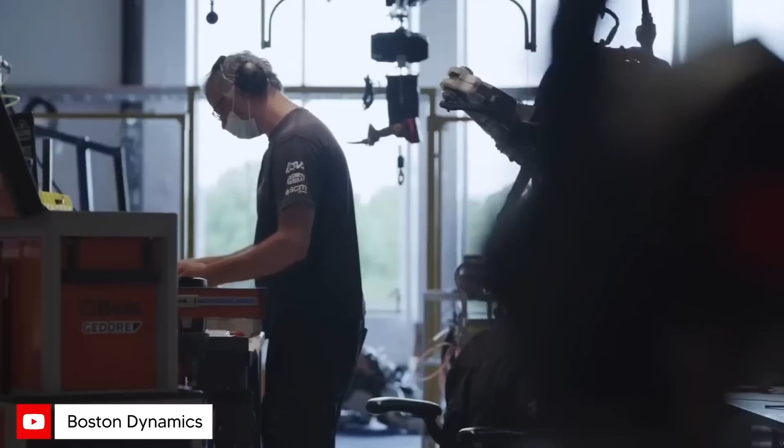Everybody knows what OpenAI is, but most people don't know that there are many AI companies out there that are silently going to be changing the world. In today's video, I'll be introducing you to 10 AI companies you probably never knew existed.

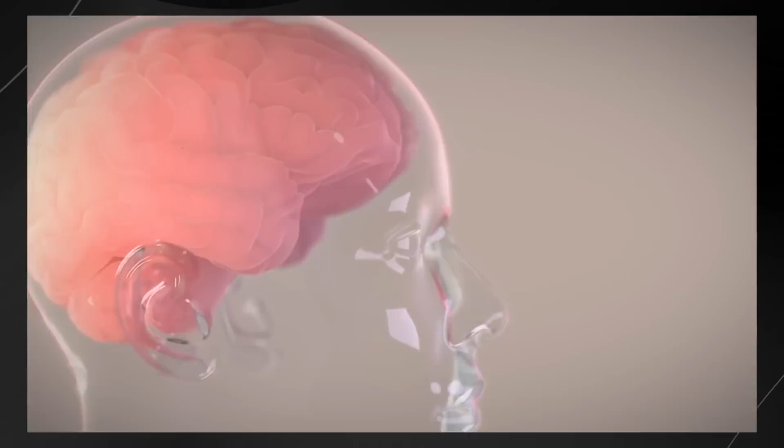So one of the first disruptive companies that you might actually know is Neuralink. This one is incredible because it lets people with paralysis, people who cannot move, use computers or phones with their mind. I know it sounds sci-fi, but it is real.

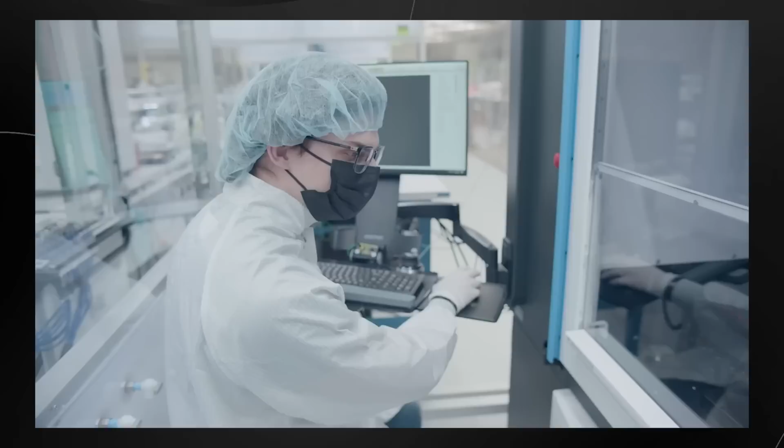It's literally one of the first companies to make this kind of brain chip small, wireless, and ready for real people, not just experiments. In simple words, Neuralink is making a brain chip that lets people control devices with their thoughts, which could change how we live, even for people with disabilities. I think that's pretty incredible and disruptive.

Another company I'd like to talk about is a company called Renovate Robotics. This is a US-based startup focused on automating roof work. Renovate Robotics was founded in 2021 and operates out of Brooklyn, New York. So what does Rufus do exactly?

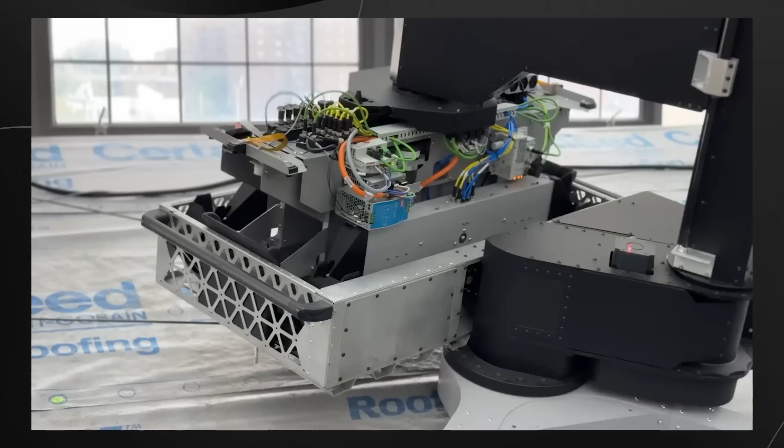Rufus is designed to automate the installation of asphalt shingles on residential roofs, with future plans to handle additional roofing tasks. Its main goals are to increase productivity: Rufus can install asphalt shingles up to 3 times faster than a human roofer, effectively doubling or tripling productivity for roofing crews. It can also improve safety by reducing the amount of time workers spend on dangerous sloped roof surfaces, helping lower the risk of injuries and fatalities, which are high in the roofing industry.

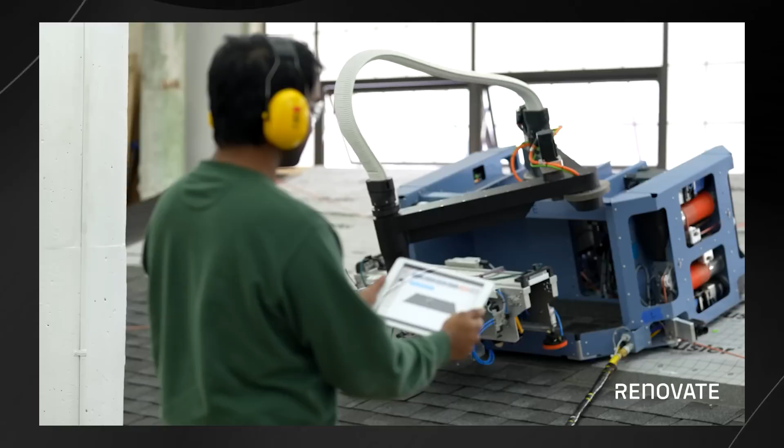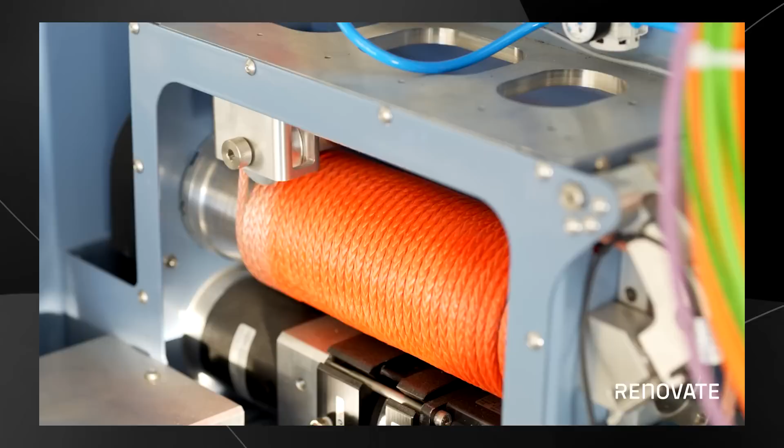This also addresses labor shortages. With a shortage of skilled roofing labor, Rufus enables contractors to complete more work with fewer people. It also enhances quality, using machine vision and AI to ensure shingles are installed accurately and consistently, improving installation quality and providing data for warranties.

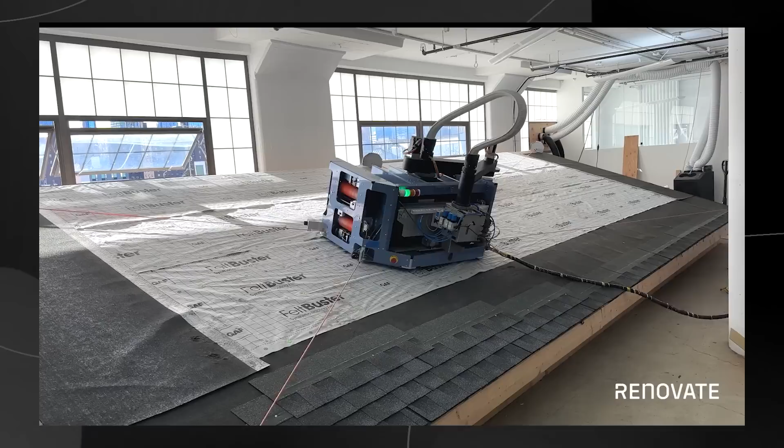Rufus uses machine vision: cameras and AI-powered computer vision to see the roof, segment shingle locations, and guarantee the precise placement of each shingle. There is also autonomous navigation.

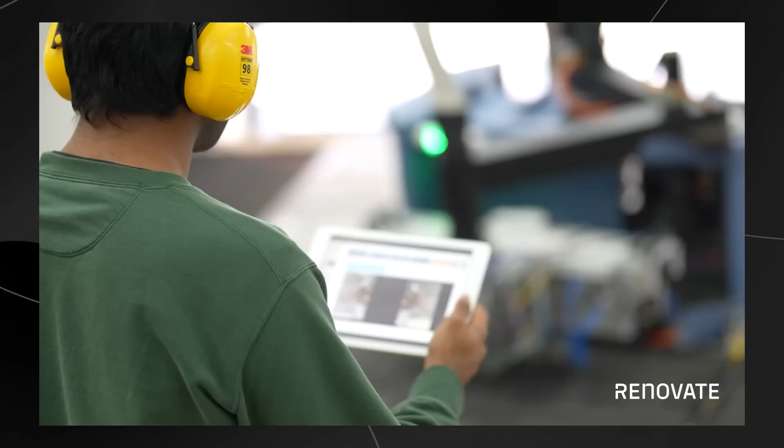The robot navigates roof planes using a winch-based gantry system, moving X and Y axes and adjusting its path based on real-time AI analysis of the roof's layout and obstacles. Rufus also records installation data, which can be shared with insurance and warranty providers to verify the quality and integrity of the roof.

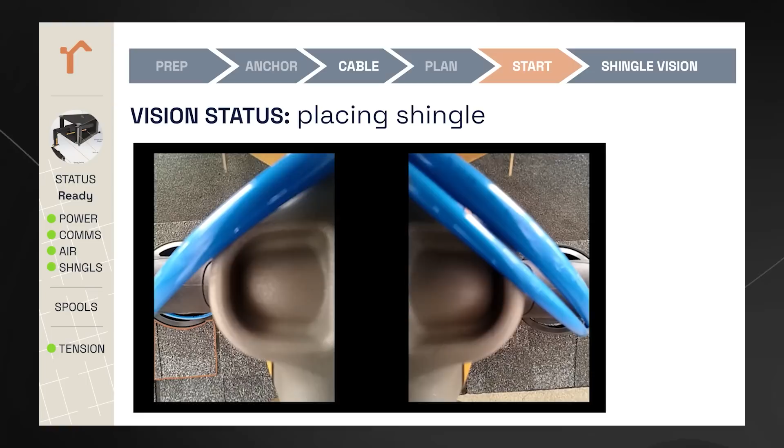If you're wondering how this is deployed, Renovate Robotics initially plans to use Rufus as a subcontractor, completing roofing jobs with partner contractors. There is also robotics as a service: in the long term, Renovate plans to lease Rufus robots to roofing contractors, allowing them to increase productivity and safety without large upfront investments.

Today we're unveiling Rufus V1. This system is half the weight, much more reliable, faster, and more accurate than the system that we showed earlier this year.

This robot will excel on big buildings, things like multifamily apartment buildings, big houses, and other commercial buildings. It'll work on slopes up to a 12-12, really helping contractors maximize their productivity on those big projects.

One other advantage to this new system is that it's much more modular. We can quick change the end effector, so that lets us test different processes. Right now we're just focused on shingle installation, but we'll be able to do shingle tear off, solar install, and other processes on the roof.

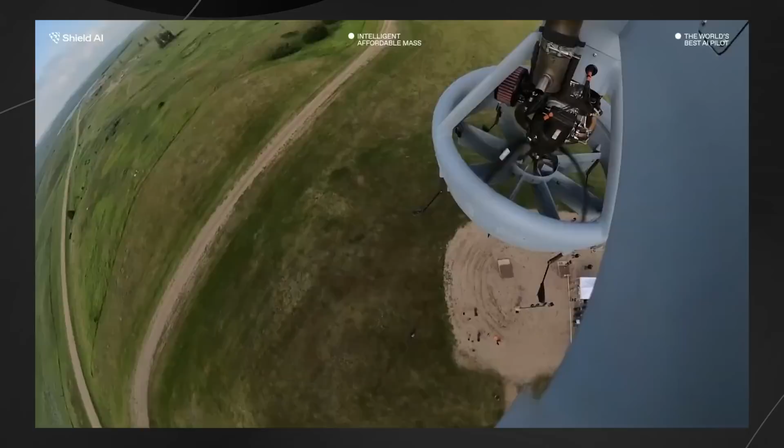The company also has and develops a suite of autonomous aircraft. Shield AI's HiveMind software can be integrated into both its own and third-party aircraft, enabling swarming operations and unmanned teaming. The software is designed to scale quickly across different airframes, supporting rapid deployment and integrations. Shield AI's technology is actively used by the US military and allied forces worldwide.

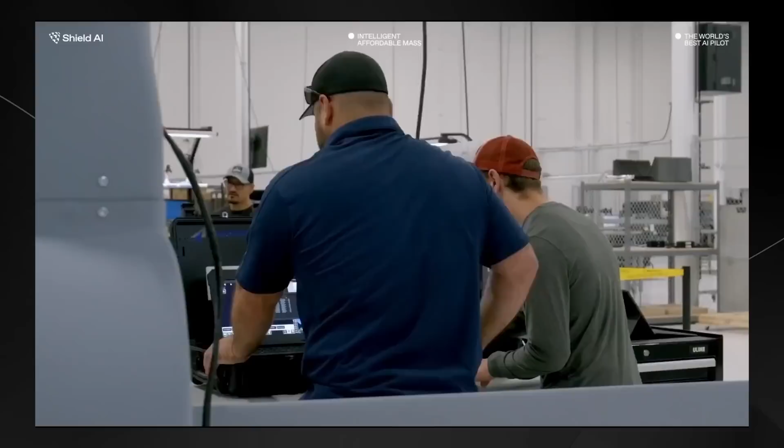Shield AI uses AI with path planning, mapping, computer vision, and reinforcement learning to allow unmanned systems to carry out complex missions with minimal human oversight. But let's take a look at what they have to say.

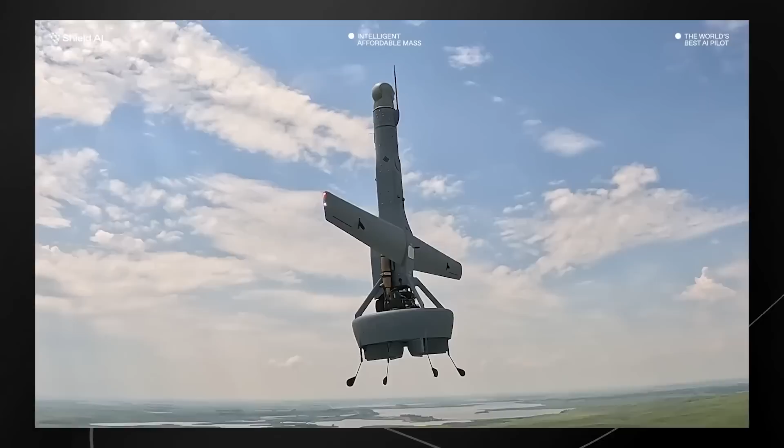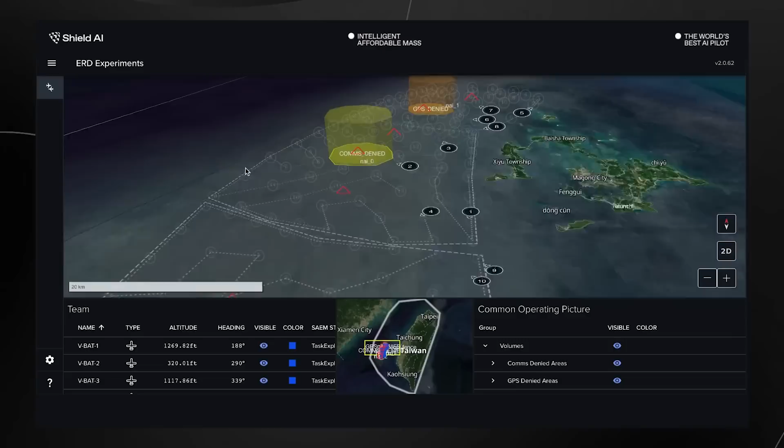The key differentiator in our autonomy capabilities and the AI that we deliver on our systems is the ability for the systems to operate in a resilient, intelligent manner. That is, to really think for themselves, to adapt to varying conditions, to operate with or without human input, to be able to navigate conditions where communications may be degraded or denied, where external information may no longer be available.

These systems still are able to operate even if they can't communicate with each other. And when they can communicate with each other, they can then progress and coordinate as a team.

V-BAT teaming enables operation in comms and GPS-denied environments by using a state estimation framework that is built up without relying on GPS, and instead uses shared sensor observations to build up a common operating picture, along with a collaborative planning framework built on top of that which expects communication loss.

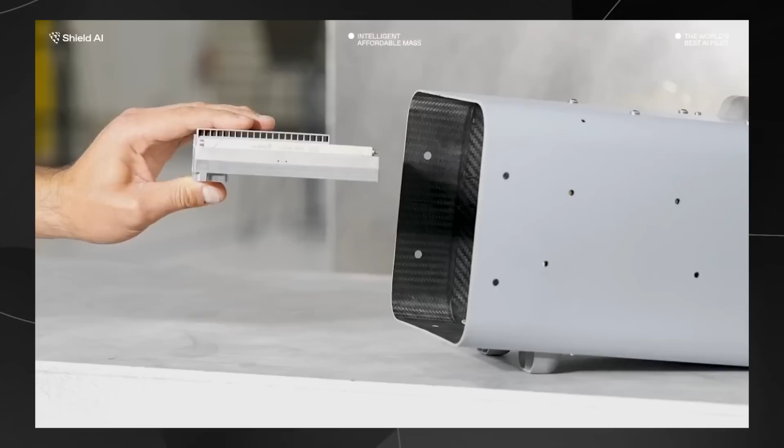One of the exciting things about V-BAT teaming is also how we're deploying the capability. We're putting our AI pilot into a payload that can go onto any VBAT coming off of our production line. So this transformational capability can be realized with a small modular payload.

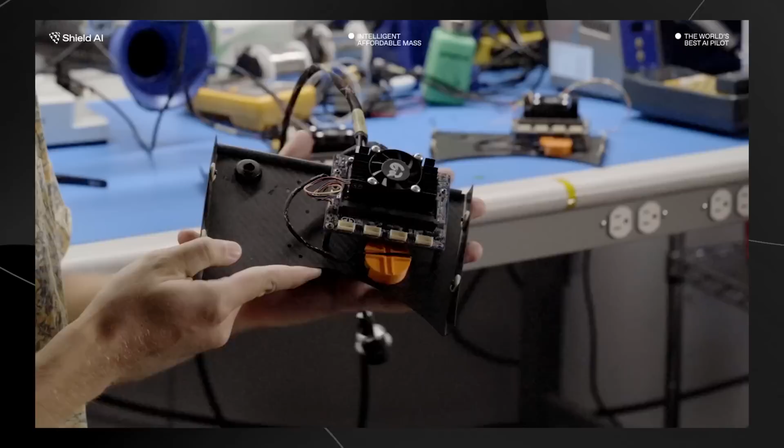Every VBAT in the team gets its own AI pilot. This modular payload mounts inside of any of our latest VBAT platforms. It contains an Xavier NX compute module with CPUs and GPUs to accelerate our autonomy algorithms, and a carrier board to allow us to interface with the peripherals.

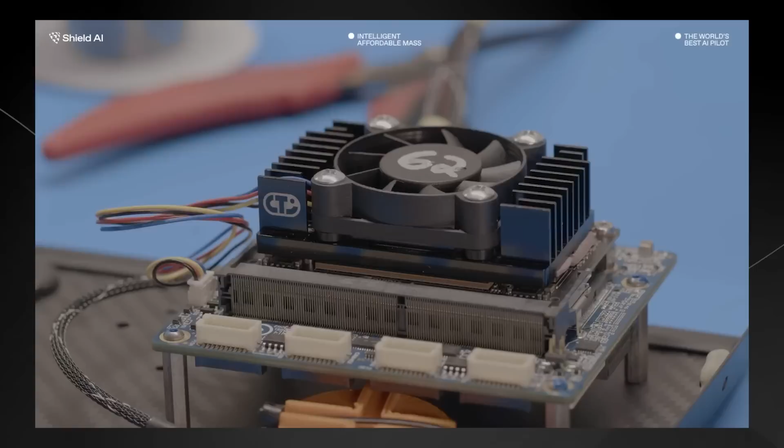Fundamentally, from the ground up, we've built our HiveMind architecture to scale for VBAT teams in the hundreds or thousands. I can tell you as a former Little Bird pilot commander in Special Ops Aviation Regiment, VBAT teams are going to be the standard by which all other autonomous teams are going to be measured.

So now we need to take a look at another company, and I think this one may actually be the backbone of the economy because it's crazy what this company can do.

This company is called Covariant, and they are an American AI and robotics technology company founded in Emeryville, California, in 2017. They are a leader in developing AI systems that enable robots to perform complex tasks in dynamic real-world environments, especially in warehouses and fulfillment centers.

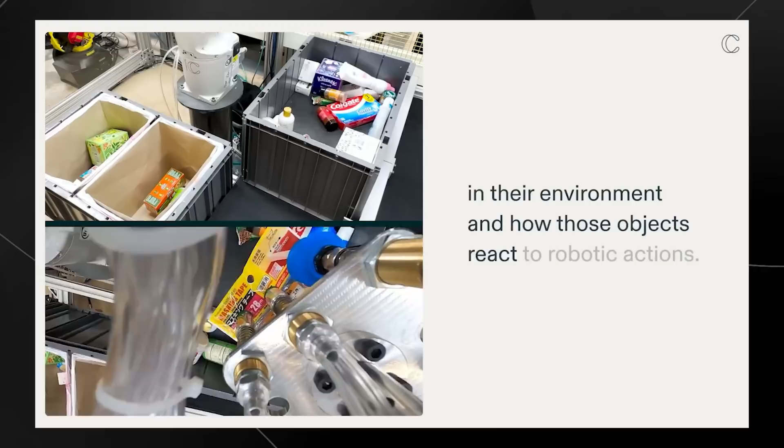So what does Covariant do? Well, Covariant builds large general-purpose AI models, notably the RFM-1, that give robots human-like reasoning abilities. These models are trained on massive, diverse datasets, including text, images, video, robot actions, and sensor data collected from real warehouse operations.

The company's flagship platform is called the Covariant Brain. It's a universal AI system that allows robots to see, reason, and act in the physical world. It enables robots to handle a wide range of tasks, such as picking, sorting, depalletizing, kitting, and order induction, often outperforming humans in speed and reliability.

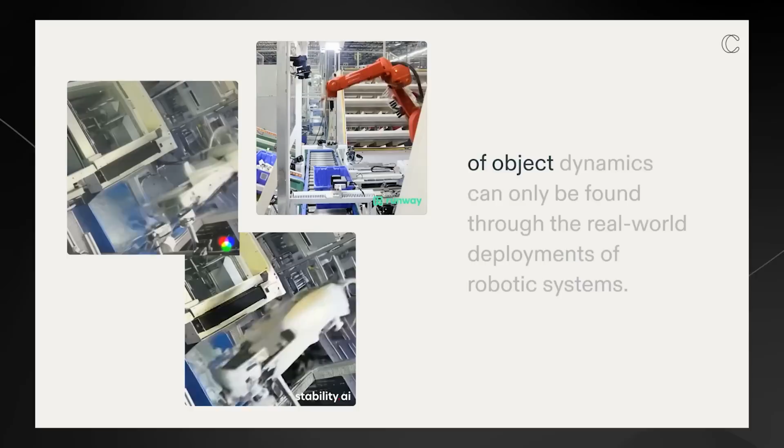Covariant's technology is widely deployed in warehouses, where it powers robotic arms and systems that pick and sort items from bins, manage inventory, and adapt to changing SKUs and workflows. The AI allows robots to learn tasks quickly and share learnings across fleets, making automation more flexible and scalable for logistics, e-commerce, and retail operations.

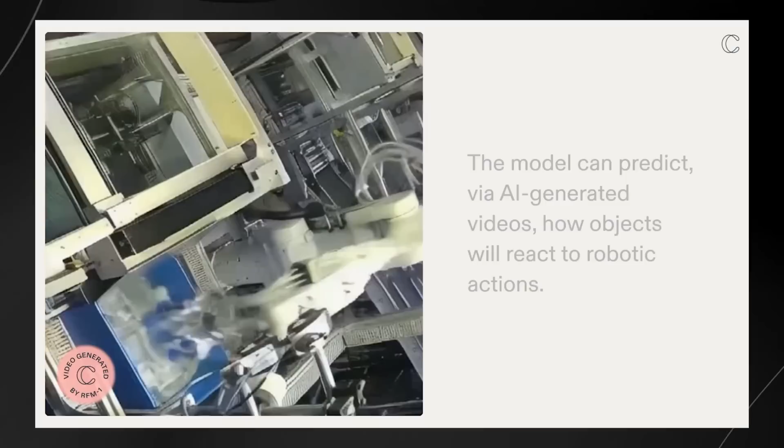Covariant partners with major automation and logistics companies such as ABB and Knapp to integrate its AI into robotic systems used by global retailers and fulfillment providers. Their technology is trusted by top fulfillment companies to address labor shortages and fluctuating demand.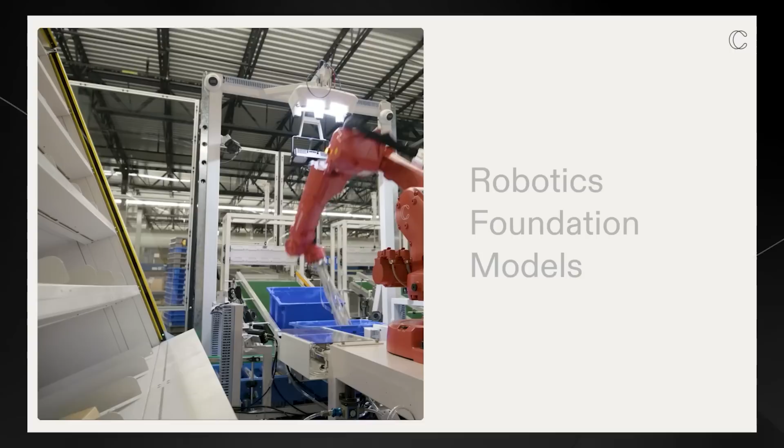Robotics foundation models have the potential to power billions of robots around the world. Covariant's RFM1 is a robotics foundation model that provides robots the ability to reason, much like humans do.

This model is setting a new frontier for what's possible by unlocking the next generation of flexible and reliable robotic systems, representing the first time generative AI has successfully given commercial robots a deeper understanding of language and the physical world. For robots to reason about the physical world, they need a fine-grained understanding of the objects in their environment and how those objects react to robotic actions.

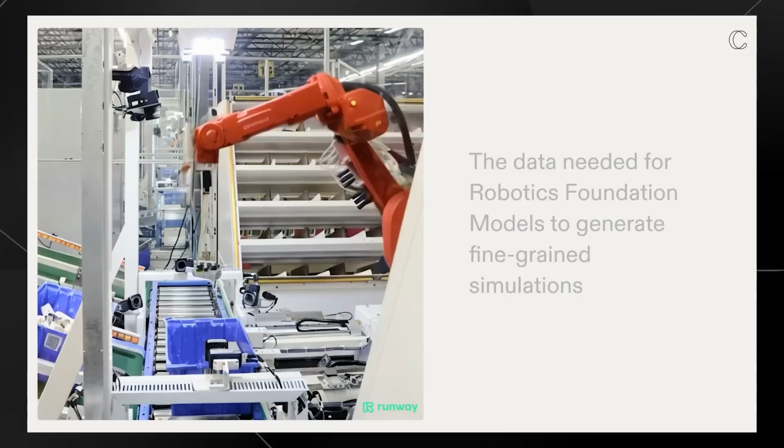Traditional computer-based simulations are limited to what can be hard-coded and programmed. Alternatively, today's generative AI models can generate text, images, and within certain parameters, videos. But they cannot generate videos of realistic robotic actions because they lack the necessary dataset focused on robotics. The data needed for robotics foundation models to generate fine-grained simulations of object dynamics can only be found through real-world deployments of robotic systems.

Since 2017, Covariant has developed the world's largest multimodal robotics dataset by deploying AI-powered robots in real-world warehouse environments around the world. RFM1 is a robotics foundation model trained on Covariant's real-world dataset, which includes the wide range of information a robot needs to make decisions.

RFM1's understanding of physics emerges from learning to generate videos. The model can predict, via AI-generated videos, how objects will react to robotic actions.

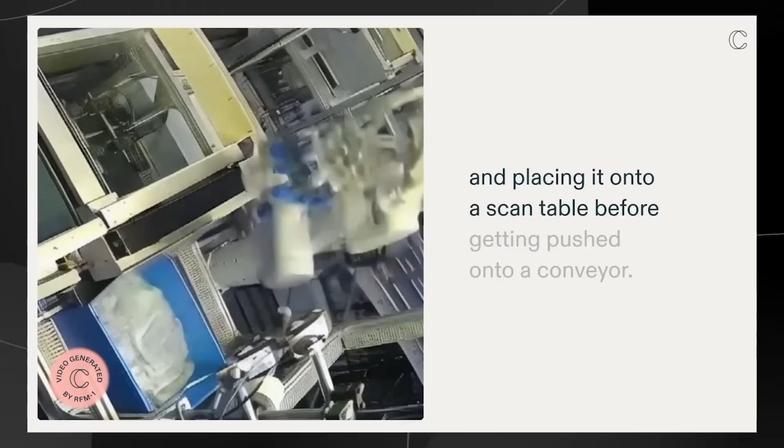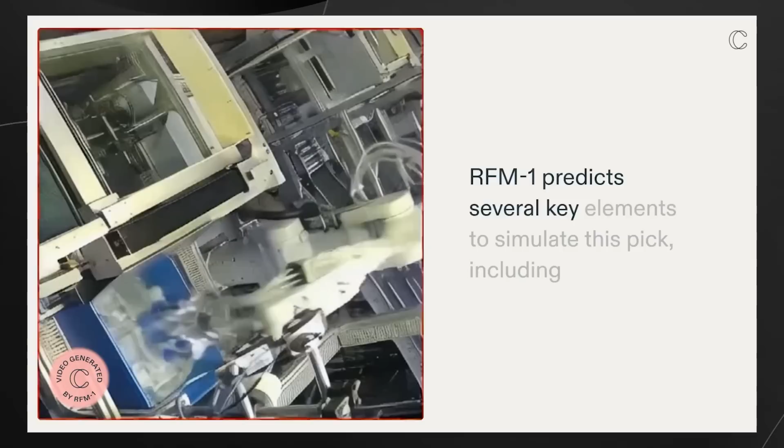There are several parts of this robotic pick and place action that are generated by RFM1. Starting with the picking action, this video predictively shows an item being picked out of a bin. RFM1 predicts several key elements to simulate this pick, including interpreting the intended robot action and deciding how to pick the item. RFM1 can also predict how a scene will change after an object is manipulated.

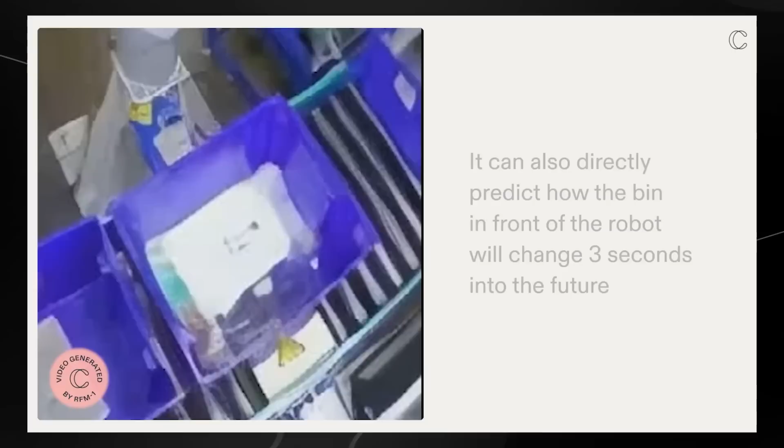For example, RFM1 predicts what the bin will look like after this item is removed. Thanks to its multimodal any-to-any setup, RFM1 is not just a video prediction model that simulates how the world would change every fraction of a second. It can also directly predict how the bin in front of the robot will change 3 seconds into the future as a result of that robot's action, acting as a high-level world model.

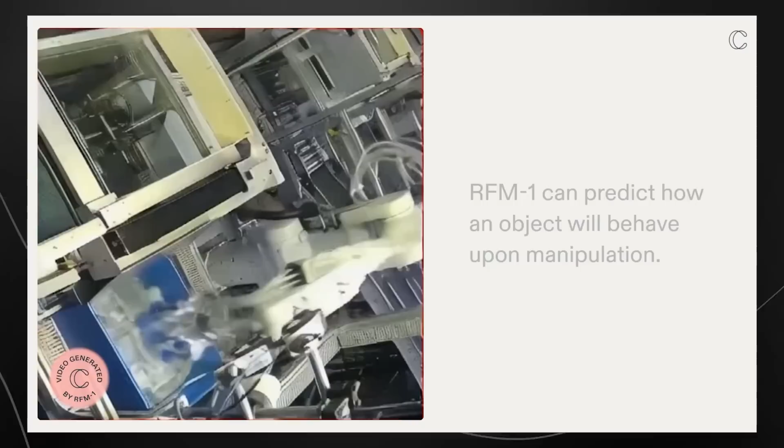The model understands the prescribed robot action and can reason about the future outcome. Here are images showing the model predicting what the bin would look like if the prescribed robot actions were executed. This shows emergent capability of RFM1 having a notion of object permanence, meaning it understands the objects that are not touched will not change. RFM1 can predict how an object will behave upon manipulation.

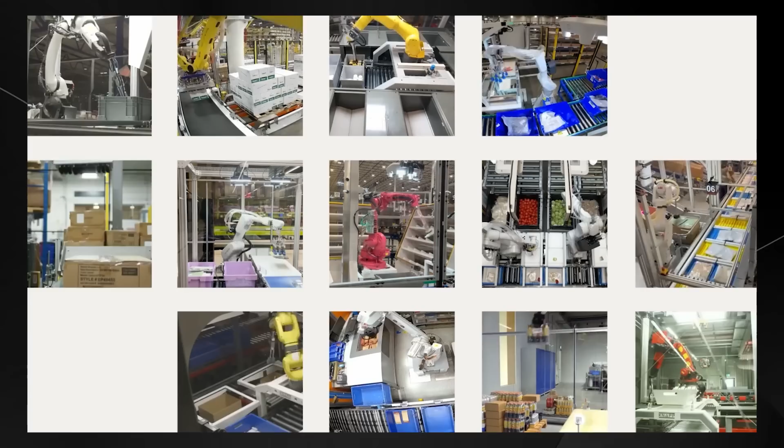Due to the complexity of the system and item physics, these scenarios would be nearly impossible to predict at scale using traditional simulation methods. RFM1 represents a new generation of flexible and reliable robotic systems that will address the growing shortage of workers willing to engage in highly repetitive, dangerous tasks, lifting productivity and economic growth for decades to come.

Another company you may have actually heard of is called Anduril. Anduril Industries is an American defense technology company founded in 2017 by Palmer Luckey, the creator of the Oculus Rift. Anduril specializes in developing advanced autonomous systems, artificial intelligence, and robotics for military and national security applications.

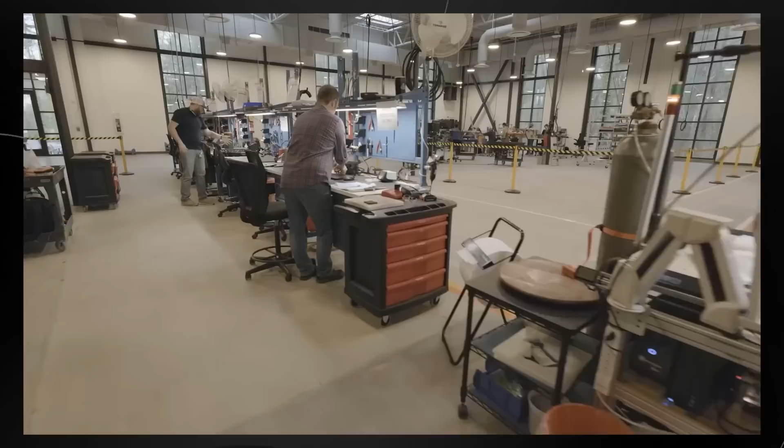Anduril's mission is to modernize and transform the United States and allied military capabilities by introducing Silicon Valley-style innovation and speed into the traditionally slow-moving defense sector. The company is notable for investing its own capital into research and development, building finished products before seeking government contracts, and focusing on rapid results driven by deployment.

So what does Anduril do? Anduril builds autonomous unmanned aerial systems and counter UAV systems, autonomous surveillance towers, and sensors for persistent monitoring and force protection. They also have something called Lattice OS, which is their core software platform.

Lattice is an AI-powered command and control system that fuses data from thousands of sensors, including Anduril's own and third-party devices, to provide real-time situational awareness, target detection, and automated decision support for operators. Anduril's systems are used to monitor borders, military bases, and critical infrastructure, providing automated detection, tracking, and classification of objects using advanced computer vision and sensor fusion.

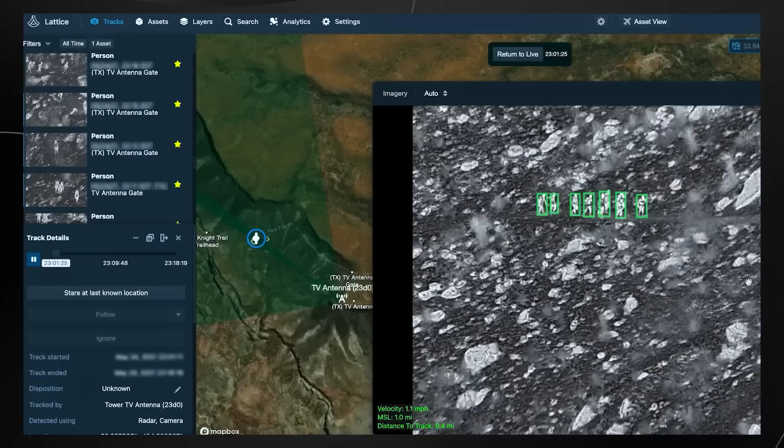This is an incredible company that's backed with over $2 billion in venture capital, with a recent valuation of $14 billion as of August 2024. Anduril is open about its military focus, aiming to keep the United States and its allies technologically ahead of adversaries like Russia and China. They even recently unveiled their autonomous fighter jet, which is set to take flight very soon, that could absolutely change the future of warfare.

Certainly an innovative company. You should definitely be paying attention to what they do.

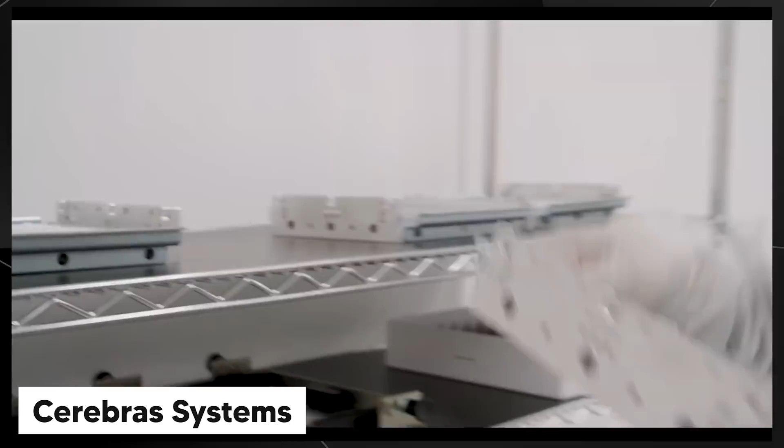Next, let's take a look at a company that could really change the chip side of things, a company that is actually trying to take on NVIDIA. This is a company called Cerebras Systems. They are a pioneering technology company specializing in building the world's most powerful AI hardware and systems, with a focus on accelerating artificial intelligence and deep learning workloads far beyond what traditional computing hardware can achieve. Founded in 2015 by Andrew Feldman and others, this company is located in Sunnyvale, California.

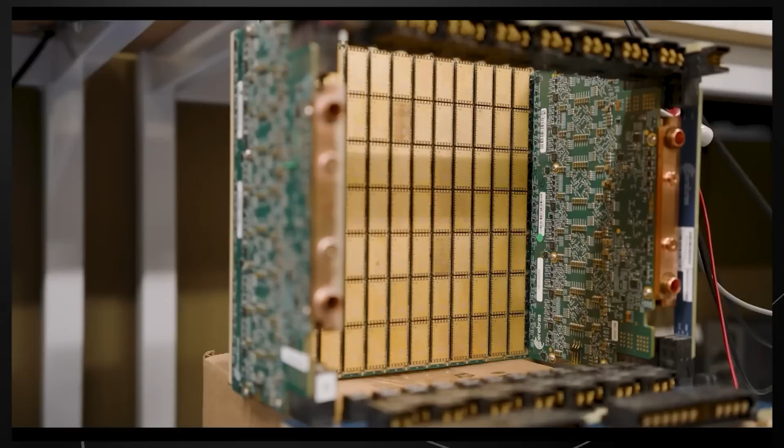So what Cerebras does is the wafer scale engine. It's best known for its largest computer chip ever built. Unlike traditional processors, which are made from small separate chips, the WSE is constructed from an entire silicon wafer, resulting in a single massive AI processor. The latest version, the WSE3, powers their CS3 system and shatters benchmarks for AI inference and training.

Cerebras packages its WSE chips into dedicated AI systems CS1, CS2, and CS3, designed for high-performance AI training and inference. These systems are used by organizations in fields such as medical research, cryptography, energy, and scientific computing to build on-premise supercomputers or access AI power through cloud offerings.

The company's hardware is engineered to dramatically speed up the training process and deployment of large AI models, such as those used in natural language processing or computer vision. For example, the CS2 system, powered by the WSE chip, features 850,000 AI-optimized cores and can train models with billions of parameters much faster than traditional GPU clusters.

Cerebras systems offer supercomputer-level performance in a space and power-efficient package, allowing customers to achieve the same computational output with fewer machines and lower energy consumption compared to conventional data centers. In addition to hardware, Cerebras provides a software platform called CSoft and cloud-based solutions, enabling researchers and enterprises to leverage their technology without needing to manage physical infrastructure.

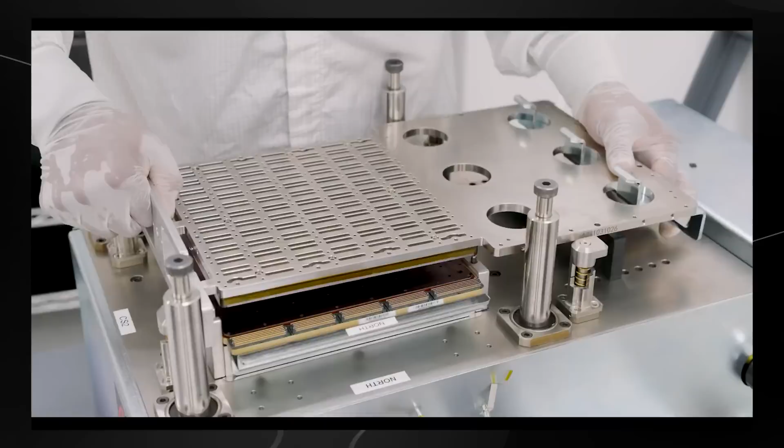From a shared vision, the Cerebras founders united to build the unimaginable. They believed they could build something better, to create the largest, fastest chip in the world. Wafer-scale integration was once thought to be impossible, but Cerebras turned the impossible into reality. The largest chip of its kind stands as a testament to human ingenuity and ambition.

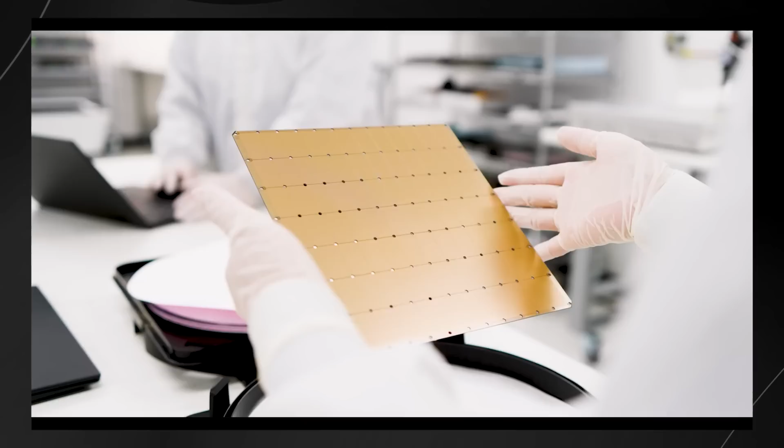A chip to power supercomputers and drive the forefront of AI capabilities. Wafer-scale engines are the biggest AI chips, now powering the biggest AI supercomputers for the most challenging AI workflows. Fueling advancements across industries, science, and global innovation, Cerebras isn't just shaping the future of AI, it's inspiring the next generation to continue to imagine, innovate, and inspire. Cerebras is powering the future of AI with revolutionary compute, designed in Silicon Valley, assembled in America, built for the world. Together, we can push the limits of what's possible.

The Black Hornet is a series of ultra-lightweight, palm-sized military micro-drones, nano unmanned aerial vehicles or UAVs, designed for covert reconnaissance and situational awareness on the battlefield. Originally developed by Prox Dynamics AS of Norway, the Black Hornet line is now produced and further advanced by Teledyne FLIR Defense, a subsidiary of Teledyne Technologies. The latest models, particularly the Black Hornet 4, leverage AI to enhance autonomy, navigation, and mission effectiveness.

So if you're wondering how this actually uses AI, the latest models, particularly the Black Hornet 4, leverage artificial intelligence to enhance autonomy, navigation, and mission effectiveness. The drone uses AI-powered systems for pre-programmed missions, allowing it to follow specific routes, avoid obstacles, and adapt to changing environments without constant operator input.

There is also collision avoidance. AI enables real-time obstacle detection and avoidance, even in complex urban or indoor environments, using onboard visual and infrared cameras. There's also GPS-denied operation. The Black Hornet 4 can navigate and complete missions in an environment where GPS is unavailable or jammed, relying on AI and onboard mapping.

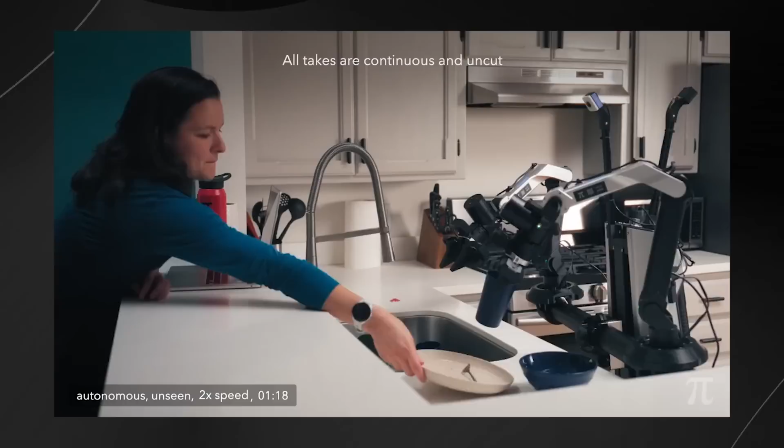Their first generalist policy, Pi0, is a foundational model capable of controlling various robots to perform complex real-world tasks based on simple text instructions. Unlike traditional robot software, which is typically tailored for specific tasks or hardware, Pi0 is designed to generalize across different robots and environments. It can handle tasks such as folding laundry, sorting trash, cleaning up rooms, and assembling boxes that require nuanced real-time decision-making and dexterity. Now, one of their most recent innovations is Pi 0.5, and right now, most robots work in factories because everything they do in there stays the same.

But if we want them in our homes or offices, we need them to be able to generalize, which is to handle chaos. And that's where the new model, 0.5, comes in. It builds on the older model called Pi 0, but this one is better at doing tasks in new environments it hasn't seen before, like cleaning random houses.

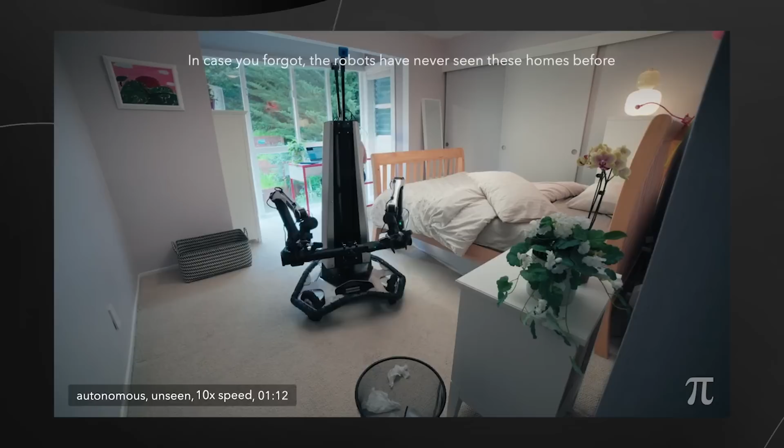So Pi 0.5 doesn't just try to do new tricks, it tries adapting to what it's learned from different robots, videos, and even humans giving it step-by-step instructions. It learns by mixing all kinds of data, pictures, actions, words, and robot demonstrations. Some data comes from robots with wheels, some from robots with no arms, and some just from the internet. The point is, lots of variety equals better generalizations.

They tested this robot in homes they'd never seen before. Tasks included things like putting away dishes, cleaning spills, or making a bed, and it didn't always get it right the first try, but eventually it figured out what the human might want to do.

So overall, this is a company that aims to create a universal brain for robots that can perform any task in any environment. And this approach could eliminate the need for bespoke software for each robot or application, making robotics more flexible, scalable, and accessible across industries such as manufacturing, logistics, healthcare, and home automation.